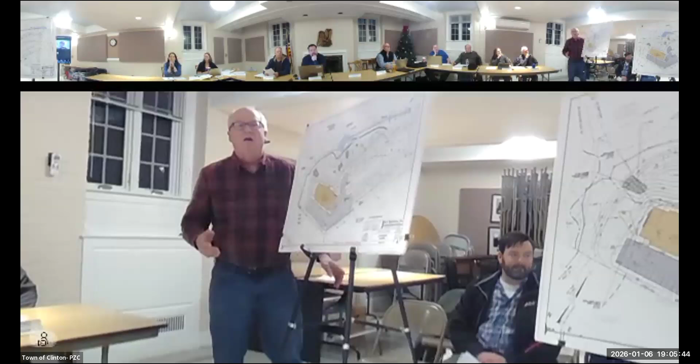My name is Bob Russo. I'm a certified soil scientist with CLA Engineers in Norwich. Ellen Bartlett unfortunately isn't able to attend tonight, but you may remember I was here for the previous presentations on this site as well. Yes, it was December of '24 that the commission voted on this. What I'd like to do, if I don't collapse the easels here, is show you briefly what's going on with this site. As staff, Abby, just mentioned, this is a change in grading on the site resulting from comments from the town's engineer review.

Just to briefly reintroduce you to the site, on the south side there's I-95, and the existing apartments here. This is at 5 Liberty Place, which is out here on the right side of the drawing. For your orientation, north is just a little bit to the right of straight up on the drawing.

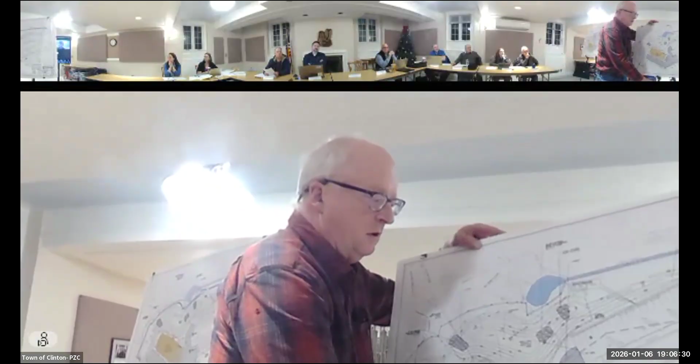If you'll remember, I want to stand in front of the previously approved plan, which is this one on your right, sheet 4. This is the plan you voted on and approved in December of 2024. You can see there was work, tracing it here, in the upland review zone. This blue highlighted line is the wetland line. The primary work in the upland review zone was really stormwater treatment, putting a swale in down slope from the existing parking lot to collect parking lot runoff and route it into a stormwater basin, as well as using this basin to treat runoff from the new impervious surfaces.

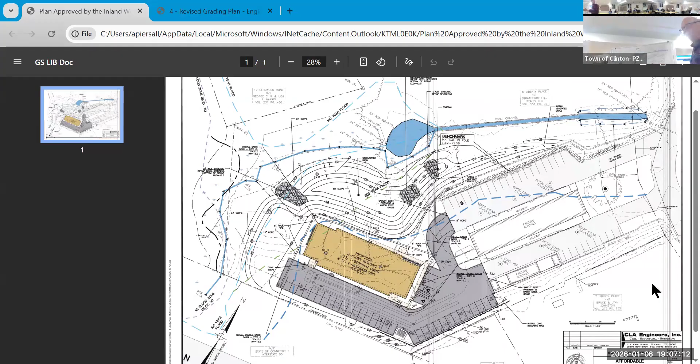The town engineer said you need to provide compensatory storage, meaning you have to excavate more material to compensate, to provide floodwater storage, because there is 100-year floodplain on the site. This blue line shows the 100-year floodplain. You want to keep the same amount of storage because some work was being done in this proposal in the 100-year floodplain, which means removing more material.

I'd like to stand between both drawings and show you the points I'm talking about. If you look at the proposed grading in the approved plan, the area on the left side of the sheet, on the western side of the site close to I-95, the grading bulges out here toward the wetland. The change made on the corresponding plan before you now is that the grading is moved back, and there's a cut, a removal of material, that comes closer to the proposed parking lot and to the proposed housing unit.

So really, the question we're posing to you is, do you want an application for this, or is it something you think staff can approve? Essentially what's happening is there's activity close to the wetland, not within the wetland. How many feet away?

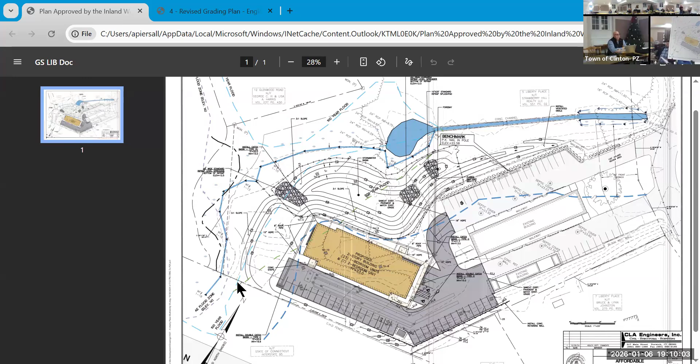What would stop anything from going into the wetlands? When you grade it down, are you going to slope it? So this area, I'm going to trace the 8-foot contour. We're basically creating a very flat area. Is there going to be a swale there?

No, but there will be erosion control, a silt fence. After the silt fence is done, it'll be vegetated. We're planning on putting a seed mix on here. That would keep anything from going into that? It would. The erosion control will be in place for about a year after.

In the meantime, this will be seeded with the seed mix, which is native plants, a mix we've used on a lot of sites from New England Wetland Plants, specified on the revised plans. This is from the town engineer, who wanted you to provide that extra flood storage capacity. What did he say about being so close to the wetlands? He didn't necessarily comment on that. Part of providing storage capacity is you need to do it within the existing floodplain.

That's going to be close to the edge of the wetland. The hatching you see is riprap, within the stormwater basin where there's an outlet. The water flows over the riprap to slow it down and keep the velocity low, so that when water comes out of the basin, it doesn't have erosive force.

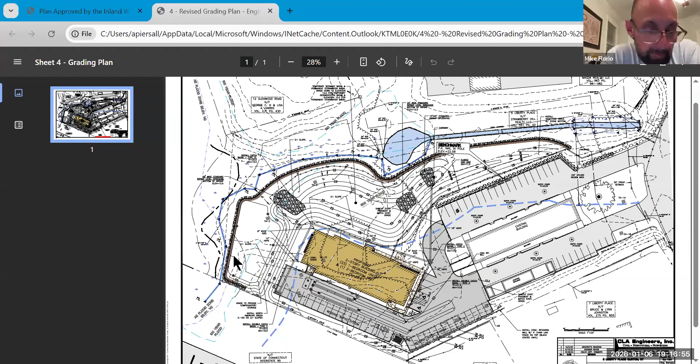The second item looks like a referral from Planning and Zoning, PZC 25-22, for 335 East Main Street. Joe Barnick from Osprey Environmental, representing Shoreline Partners, is the applicant. Shoreline Partners LLC is the owner. It's map 88, block 69, lot 124, zone RB2.

It's a referral from P&Z. This is an application for a self-storage facility at 335 East Main Street - one warehousing building and one self-storage facility, to be received by the Planning and Zoning Commission at their January 12th meeting. This is adjacent to 327 East Main, where there were significant flood and wetland issues previously. This property is on the other side, so some proposed improvements are within the 100-foot upland review area of that wetland.

Let me pull up and share the screen so folks can see. So the wetland area is along this line, and this blue hashed dotted line is the 100-foot review zone. Currently shown on the plans, though it may be amended, is a perimeter security fence for the whole facility - no real grading is proposed there. There's been talk from the applicant about moving that fence outside the 100-foot review zone so nothing is within that area. A couple trees they proposed to plant may be removed, and there may be some limited grading with a small encroachment into the upland review area during work, but the final improvement is meant to be outside.

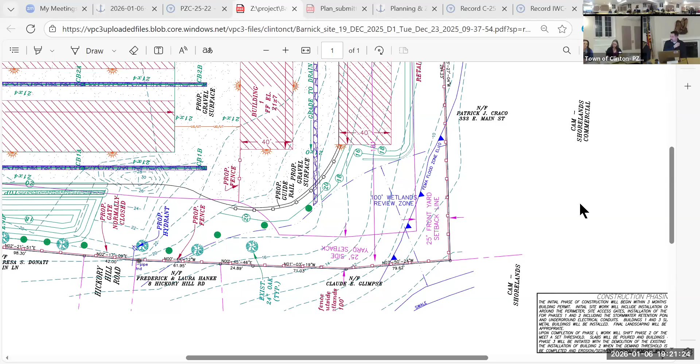So it would be up to us - do we think their work inside, well really, if it's upland of 50 feet, it could just be a WEO permit. If it's inside 50 feet, typically Kathy refers it to us. What is it, inside 50? Well, they're currently showing it inside, but only the fence, and the applicant has indicated they're going to move that out. That's the intention, it just hasn't happened yet - we haven't received those plans, but I believe that is the intention. So that would take it out of the commission's purview. I'd say if the fence gets moved 50 feet or further from the inland wetlands, it can just be a WEO permit - I concur with that, Kathy. Yeah, and that seems to be the intent, so they stay 50 feet out.

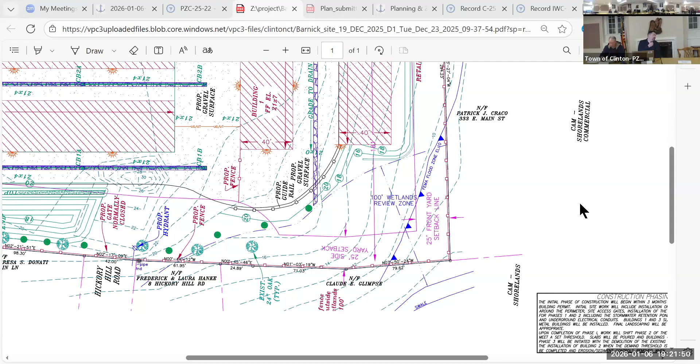So a formal application to the commission isn't necessary, just an application to WEO. Do we need to do that by motion? That'd be great. Can we make that a motion to refer this? I'd like to make a motion for PZC 25-22 to have Kathy King make the determination - as long as it's outside the 50, she can make the administrative approval. Good, do I have a second to that motion? I'll second it. Any discussion?

Okay, all those voting in favor say aye. Aye. When opposed or abstained?

Motion carries. So, Abby, you're gonna make sure that it's either moved entirely outside, or if it's within that 50 to 100 area, then it'll go for a WEO permit.

Okay, thank you. All right, on to item number 7, old business. This is C-25-76 for 81 Old Orchard Road, Assessors map 6, block 2, lot 7-110, in the zone R80. It's a show cause hearing continued from last month's meeting for Lee Bowler, property owner, for work conducting regulated activity within 100 feet of an inland wetlands or a watercourse without a wetlands permit.

So we did have Kathy's report. She gave us an executive summary with the discussion of what has been ongoing. I don't know if everyone got a chance to read that, I think it came a little bit right before the meeting.

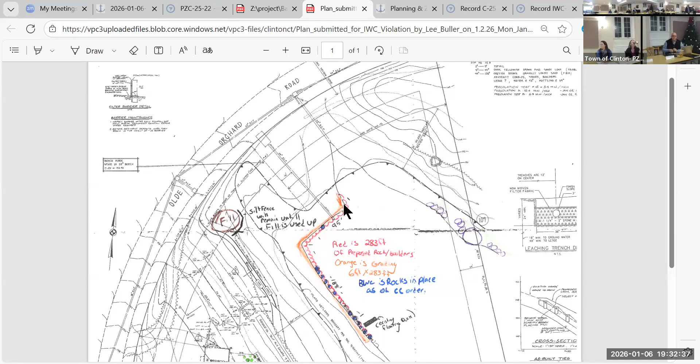Oh no, that's all the way over. And around your lake too, I wouldn't.

So this is what he's proposing, it looks like by the orange that's where you want to fill to. Because I don't want to disrupt the pond, I'm putting the rock, small boulders, at the edge of the pond, and then grading from that boulder back and planting grass.

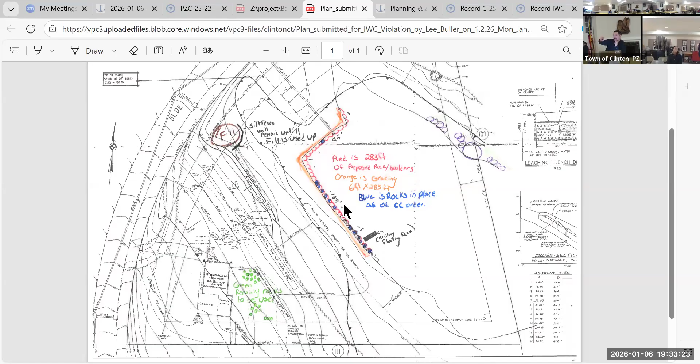Because there's no way to maintain it if it's just a boulder, and then what I've got with the sinkholes and everything else. So the plan as depicted now is going to show placing the rock at the edge of the pond. So how your property is currently delineated is that triangle line, with the little black triangles on it, that's kind of offset - that one is your wetland line.

Yes, so you're showing work inside the wetlands and actually filling in the wetlands. Well, inside the wetland line, but not filling the water course. So wetlands are soils, poorly drained soils. That's why at the edge of the pond, as you look around it, there's like a barrier, probably 5 feet wide, of what is wetland. So you're proposing to fill that.

To bring it back to where it used to be. So typically, anytime we have a permit that shows filling a wetland - you can't fill the wetlands, you can't say that you can't fill it without an application. But if he's going to fill the wetlands, you need a permit. I would recommend that our course of action would be to allow the applicant to submit a permit. There's in our application some extra things you have to do, to tell us how much you're impacting, how much fill you're going to be putting in, where it's got to go.

Silt fence, we want to see stuff like that, limits - you kind of have it, but. I have the location of where the silt fence and stockpiles are. And the stockpile, that's where the stockpile was. You don't have to put a silt fence in the water, because he's filling up to the rocks. The rocks are gonna be right there, keep it there.

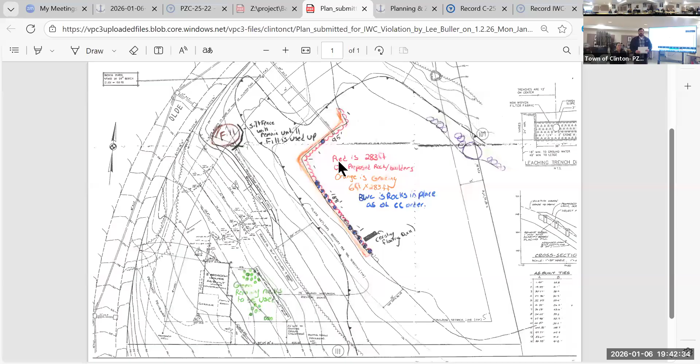So what staff has done is prepared a motion, just for the normal course of stuff, for the permitting track or where the commission wanted to go. There's a proposed motion in here to kind of revise that cease and correct, to push this in that direction. And then we'll be in touch, make sure the application is complete, make sure it's received at the next meeting, and then move things to a site walk and get you ready.

We're right on track, except make sure that he doesn't have to have a delineation. And you made that clear tonight, so when that application comes in, staff will be okay with that, it won't be required.

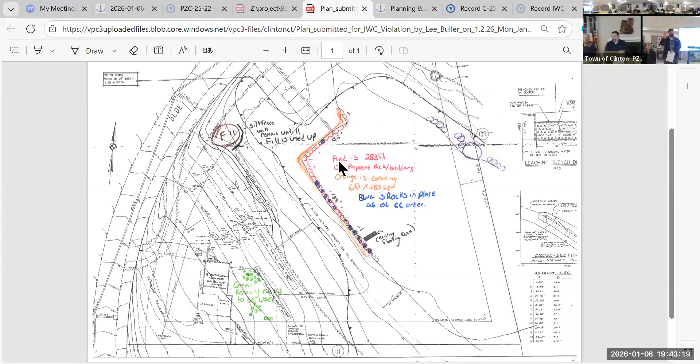Most of the time, it's just that you don't know that you need a permit for this. So I wasn't trying to be difficult - no, you were very cordial when you went out there. So I'd be curious to see if that was permitted. The 79 was permitted, it was done through an IWC permit. And I followed basically his permit when I filled out my application.

So there is one permit across the board. You know, when you look at the pond, all those rocks, that was the last permit that we - okay, and with the application, we can include that decision in the record, so you have that to compare it to.

So there are three properties that have rights to that pond. There's my portion, which is the largest. 79 Old Orchard owns the next largest portion, and then the Navarros - we're all very close - they're 83 Old Orchard. They have some in the back, where it's all completely overgrown, in the back corner, where the pond actually turns into some sort of brook or something and goes off into the woods.

Once you get that permitted, then we could schedule a site walk and go out there, and hopefully we have better weather - you guys didn't have terrible weather, but everybody else did. You gotta go on a weekend, because during the week you'd break your legs in all those holes. Yeah, I don't want to be hurt - the sledding's been a little treacherous, we'll say.